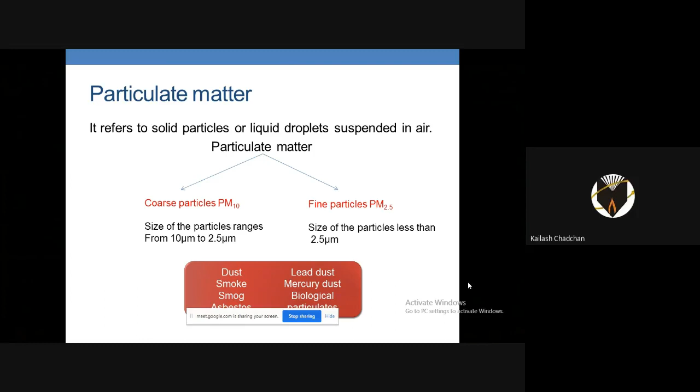The particulate matter includes dust, smoke, asbestos, smog, lead dust, mercury dust, biological particulates. So all these together refers to the solid particles or liquid droplets suspended in air. It is called as particulate matter. So there are various sources of particulate matter like dust. It is due to crushing of ores, minerals, transportation, etc. And the effects of dust particles in the air leads to various allergic and respiratory diseases.

Smoke, as we all know, is caused due to industries, furnaces, locomotives, etc. It causes irritation of eyes, throat, affects lungs, and in severe cases, it may even lead to lung cancer also. Smog, as we all know, is nothing but smoke plus fog. Exhaust emissions are primarily responsible for smoke, and that is smog. It also causes irritation of eyes, nose, throat, lungs, etc.

So asbestos, it's the most dangerous one. Asbestos dust. Asbestos is being used in various roofing materials, gaskets, ropes in automobiles as insulating materials. The peculiar characteristic of asbestos is it doesn't undergo burning. We cannot burn it. That is why it is being used in various insulating materials. As you can see the image here, which is nothing but the roofing material made up of asbestos.

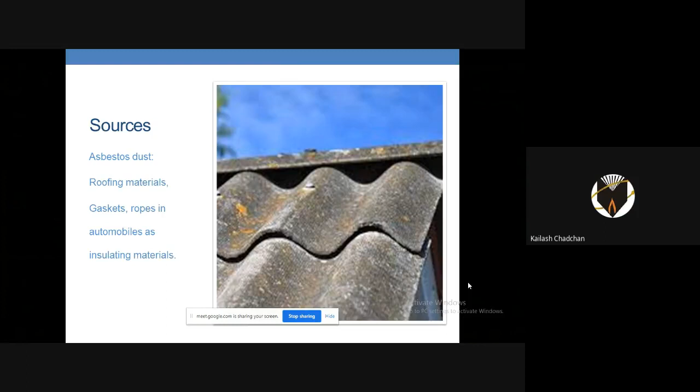It leads to lung cancer, various respiratory problems, and a peculiar disease called asbestosis is caused by the asbestos dust. Breathing high levels of asbestos over a longer period of time, the fibers of this asbestos penetrate deep into the lungs, which leads to scarring or fibrosis in the lungs, and that we call asbestosis.

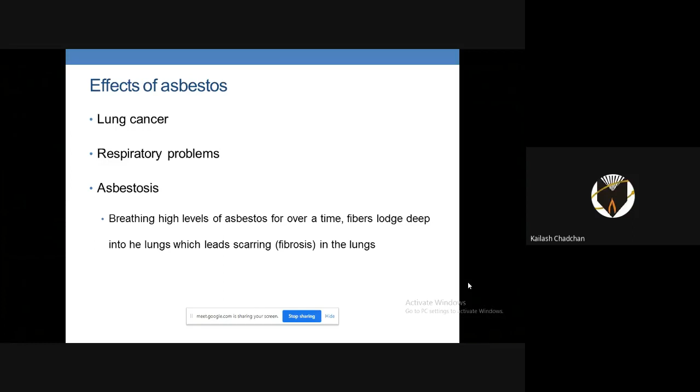In addition to what we have discussed so far, lead dust and mercury dust are also part of particulate matter. Lead dust is due to the addition of tetraethyl lead, tetramethyl lead to the petrol, various lead containing batteries, various paints containing lead. The effects of lead content are anemia; it damages the nervous system, kidneys are damaged, decreases the bone strength, disrupts hemoglobin synthesis. So we know if hemoglobin synthesis is disrupted, then the oxygen carrying capacity of the blood is completely disrupted.

Then mercury dust. The various sources of mercury dust are battery manufacturing industries, fertilizer or pesticide industries, mercury vapor lamp manufacturing industries, various cosmetic industries. It affects the mental health, destroys lung tissues, reduces immune system, damages kidney, affects aquatic life. So various kinds of issues will be there due to the mercury dust.

Apart from all these things, we have biological particulates as part of particulate matter. So here we have various bacteria, viruses, protozoa, algae, etc. And the effects of these biological particulates include spread of various infectious diseases.

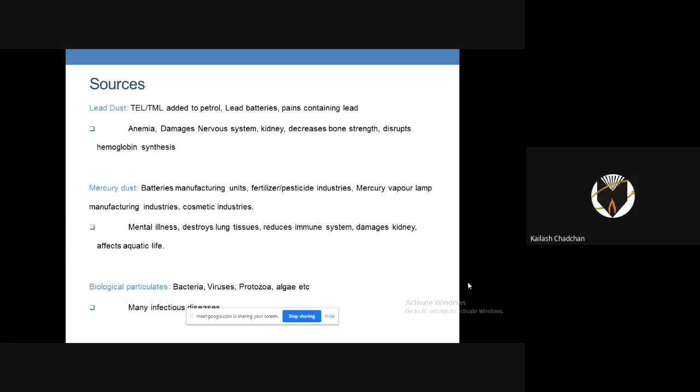Now, how to control the particulate matter? Particulate matter can be controlled by using many devices like gravitational settlings, centrifugal cyclone collectors, wet collectors, also known as scrubbers, then electrostatic precipitators, fabric filters. By using these devices, we can control the particulate matter present in the environment.

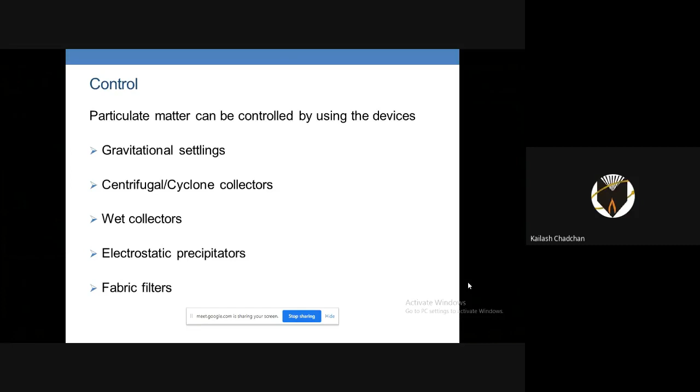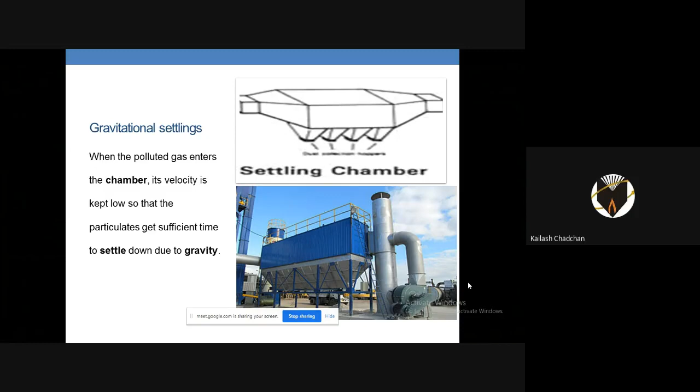This is how a typical gravitational settling looks like. What is done here is the polluted gas is made to enter into the chamber, and its velocity is kept very low so that the particulates get sufficient time to settle down due to gravity. So in this chamber, the polluted gas containing the particulate matter is passed in, where the velocity is kept very low so that the heavier particulates get settled down at the bottom due to gravitational force. This is what is done in the case of gravitational settling chambers.

And this is another kind of device, cyclone collectors. Here, the incoming polluted air is made to enter the cyclone chamber, wherein it spins quickly. As it moves down and then back up the unit on its way to exiting through the outlet, the centrifugal force generated by spinning the air and changing directions repeatedly causes the larger dust particles to be flung outwards, where they strike the side of the unit and then fall down towards the discharge. So this is how it will be done.

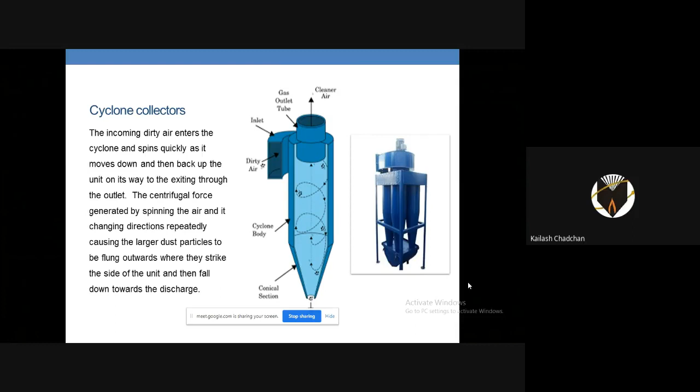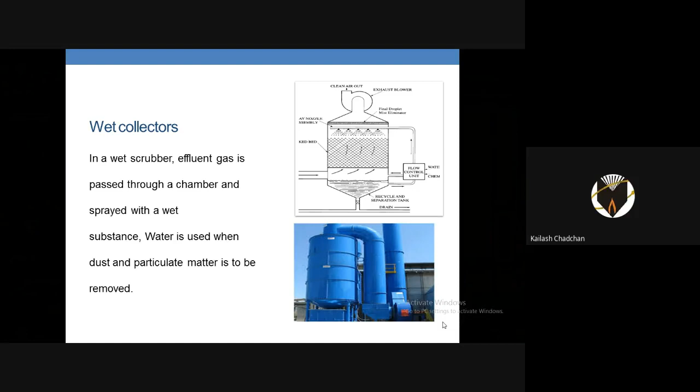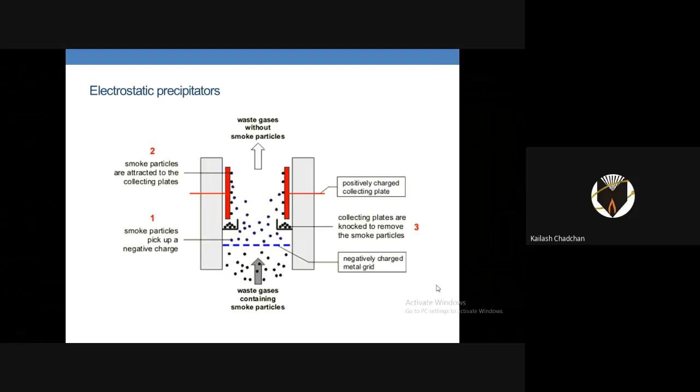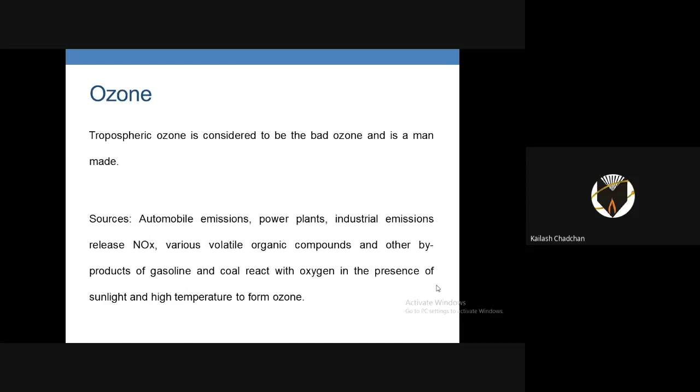So, guys, these are the different ways to control particulate matter pollution. So this is all about the prevention and control of particulate matter in particular.